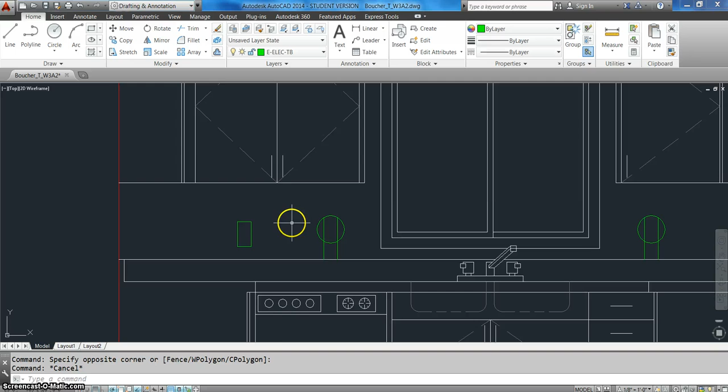Okay, so the next thing I'm going to do is I'm going to draw a 1 by 1 square for the actual outlet because I measured it, so I know that's what it is. So I'm going to do the same thing, rectangle at 1, 1. There we go, that looks good.

Now what I'm going to do is I'm going to move this from the midpoint to the midpoint here, and then I'm going to move it down.

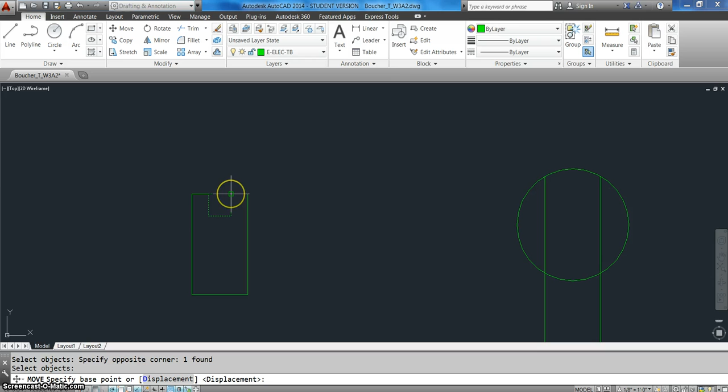If it's 4.5 inches and I've got 2 inches of outlet, then this probably needs to come down about 1/2 inch. So I'm going to start my base point here, and I'm going to come down 3/4 of an inch. That looks better. I should have measured it, but I didn't.

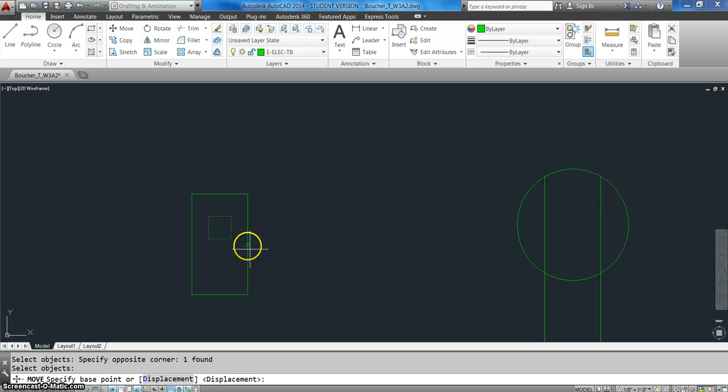And then I'm going to mirror this one around the midpoint. That's not quite perfect, is it? So obviously I'm going to kind of do a little bit of adjusting here until I get it to look the way I want it to look. So I'm going to come down another, about 1/4 inch. That's good. I could just go measure it, but I'm just eyeballing it.

Mirror, MI. I'm going to select this object to mirror. I want to mirror around a line that goes through the midpoint.

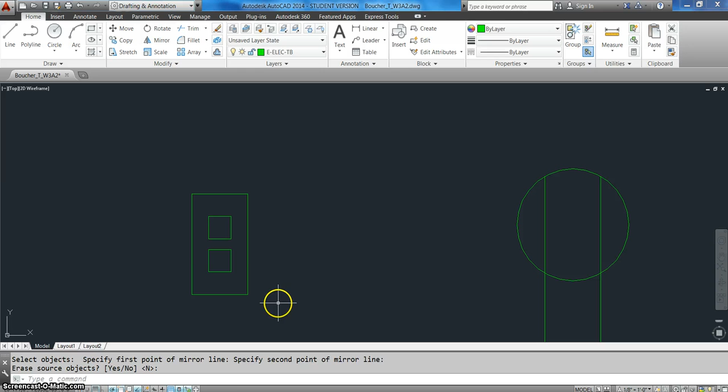And there we go, that looks good, doesn't it? Okay, so now let's put this thing on layer 0. I'm going to select all this stuff and put it on layer 0 so that I can make myself a block.

So I'm going to go to the insert menu and do create block. I'm going to name this duplex, because it's a duplex receptacle. It has two, duplex-ele.

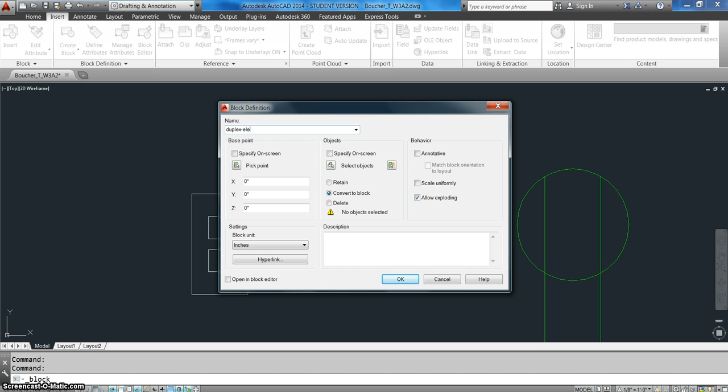Okay, so I'm going to pick the base point, and I'm just going to pick it right here. I'm going to select the objects I want to make into a block - these three. There we go, done. Okay, so it went ahead and turned it into a block and inserted it on the active layer, which is the electrical layer.

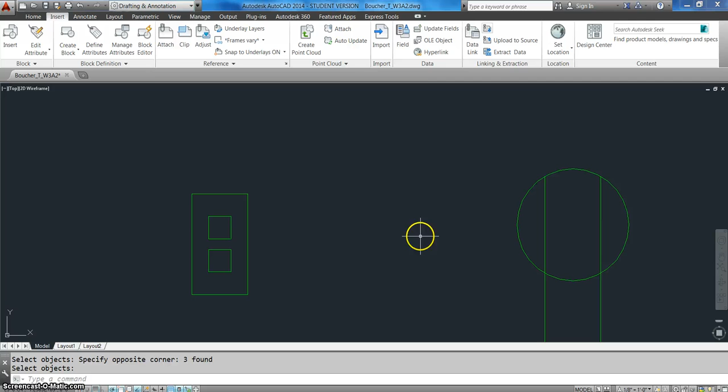So now I'm going to move this guy from here, and I'm just going to put it at the center, aligned with the center of your block. There we go, that looks good.

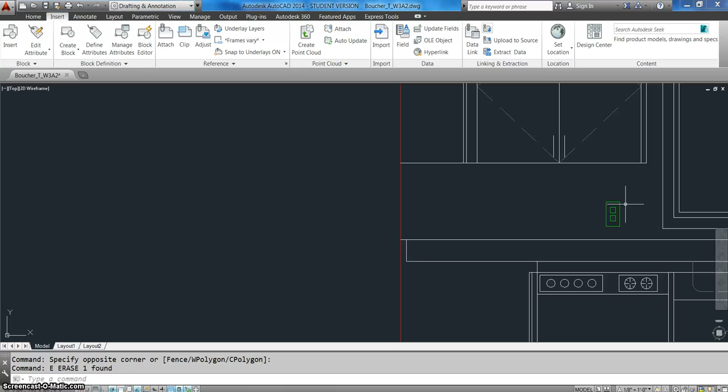So now I'm going to copy this over to where the other one is. Actually, you know what, I'm going to mirror it around the middle of the sink. So I did the mirror command. Now I'm going to select my block.

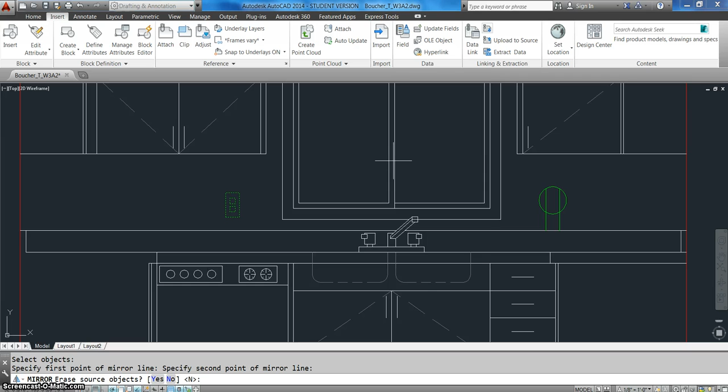I'm going to select the midpoint of the faucet. I'm going to go straight up. Now it says erase source objects - no, I want to keep it. Erase. And now I'm going to erase your outlet.

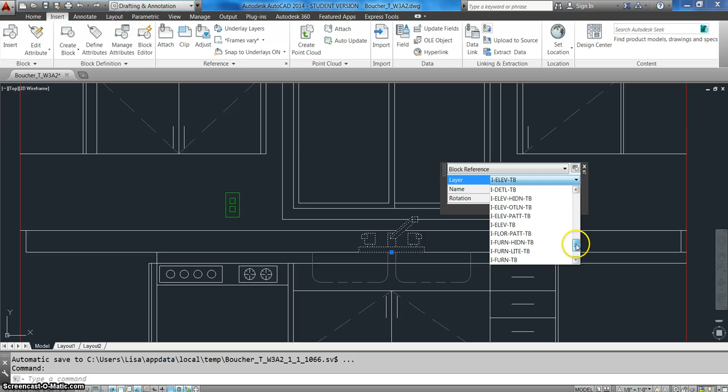And you have cute little outlets. Okay, just like I said with Rita, you need to come back and put your faucet on a layer that's going to print lighter. I would suggest - you could put it on plumbing, but if not I would put it on, see what you think, between the pattern layer or putting it on the plumbing layer. But, ooh, that - well, no, not furniture.

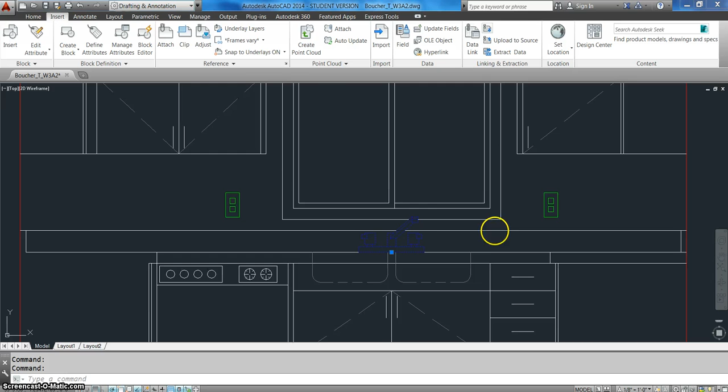This will really come into play more when we print these, but if it's left on that white layer, I think it's going to be just a muddy mess and you won't be able to see any of it. Okay, so that elevation looks pretty good, except for that.

So now we're going to come over here. Okay, same thing applies for your outlet, so you can just copy one of those from over here. There we go.

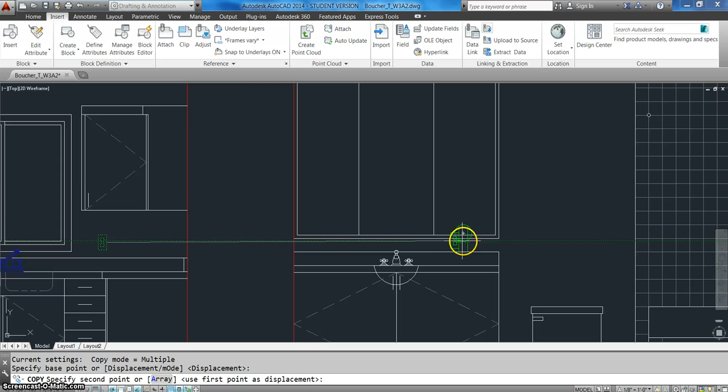And I am going to just put it right there for the moment and then move it down. A lot of times you'll see outlets in bathrooms are set sideways so they fit, and I think this one will probably need that, but that's some fine-tuning I'll let you do. Okay, this line should be hidden.

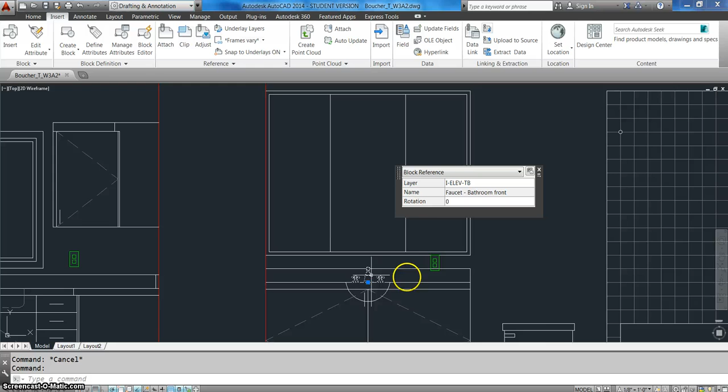This faucet should be on whatever layer you chose to put the kitchen faucet on, and I would ponder putting this on the same layer as that too. Your medicine cabinet - go ahead and put the door swings in so we can see it. Other than that, that one looks pretty good.

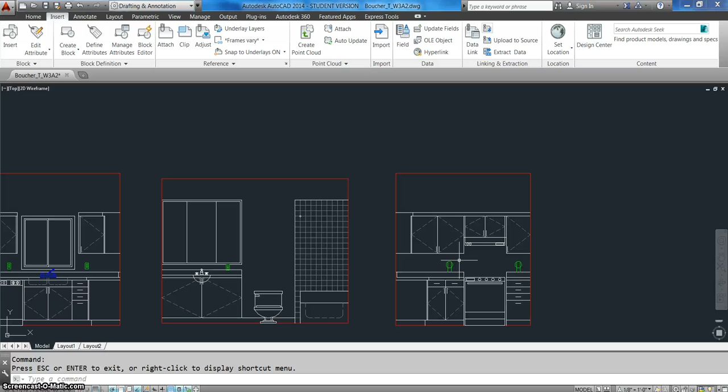Now then, if I go one more step over, we have pretty much the same set of issues that we have on the other drawings, which is to say we want to show the same level of detail on the base cabinet in terms of cutting out the countertop and the kick as we do on the uppers. And we want to show the receptacles in elevation instead of using the plan symbol. Other than that, I think you're ready to add some tile and have some fun with it.